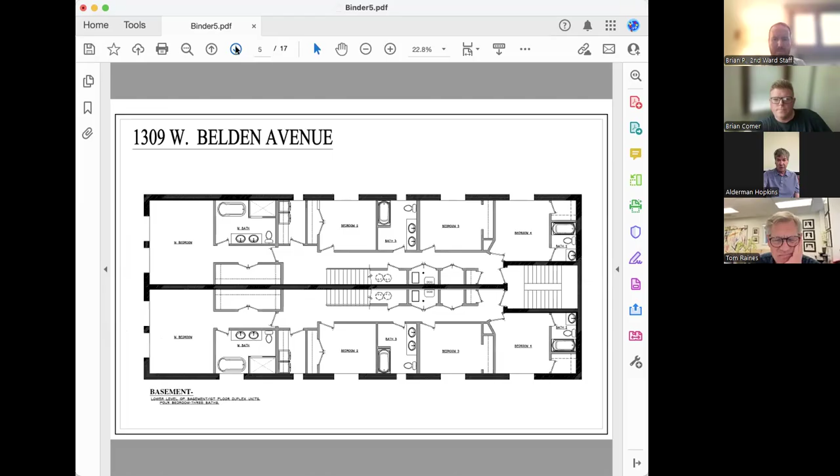If they seek a zoning change or if they seek a variance through the Zoning Board of Appeals, or even in some cases, if they seek a permit, which is incumbent upon us to consider whether we issue or not, they are entitled to due process. And tonight's meeting is simply to provide that for them out of a sense of fairness.

It doesn't mean that any decision has been made, and it doesn't necessarily mean that this is a track to approval or denial. It's simply one more step in an open, transparent public process that I, as the alderman, would grant to any landowner anywhere in my ward that was seeking to do a development deal.

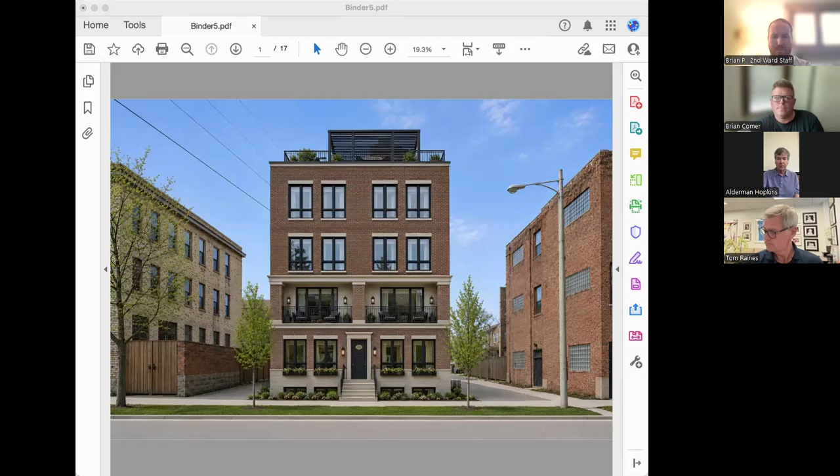So that's why we're here tonight. We're going to assess the proposal that you see. This is a new one. I know some of you are familiar with the history of this parcel and with some of the proposals that have been offered over the years. This one is different, and there may be pros and cons to this proposal that were not present in the previous iterations. So that's why we're soliciting neighborhood feedback.

That is a very important process in my decision making. I take my neighborhood seriously, and I take your opinions very seriously. So we're going to use tonight to gauge that. No decisions will be made tonight, but we will keep the lines of communication open in the following weeks, so you can continue to engage and tell me what you think of this proposal, and see if it passes muster with the community.

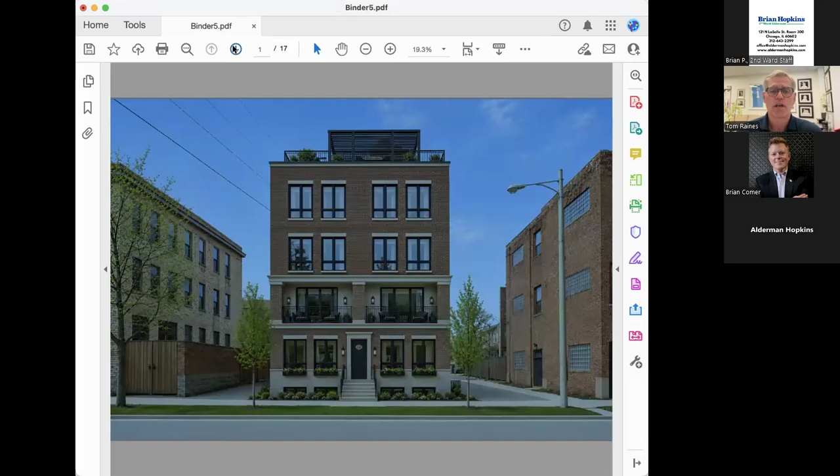Before I do that, I'd like to share the site plan for the entire parcel. I have to make a turn here to do that because of the way it's laid out.

So I'm going to share my screen. Can you see the screen here? I'm going to rotate it to landscape, that might be a little easier. I just have to twist it and make sure it's sharing because I can't see it in double mode.

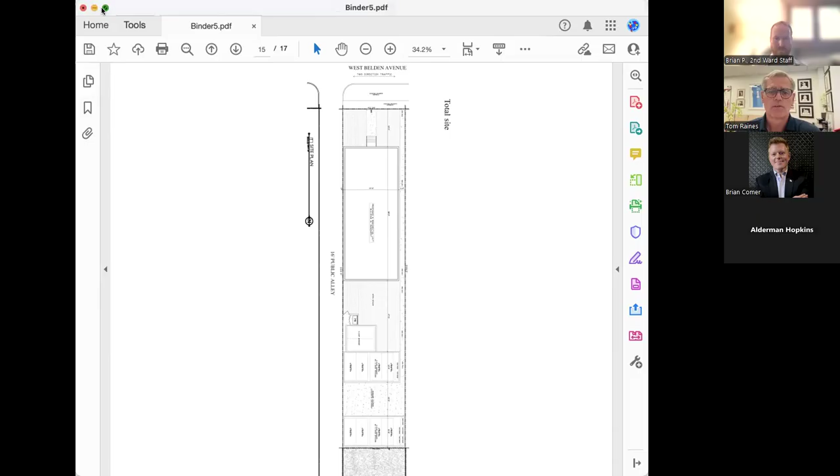So I am going to rotate this view and give everybody an idea of this entire parcel. I'll try to zoom it once, we may lose some area, but this is probably about as close as I can get. On the left side of the screen is Belden, facing north. This is east, this is west, and the rear of the property is south.

Combined, this entire parcel is 19,228 square feet. As you can see, we've split it up. It's roughly 42.25 feet wide along Belden, running west to east, and running north to south it's 455 feet in length.

The proposal here is to take the front half, the north half, and let me zoom out so we can fit the whole site plan in. It's this parcel here to be developed, and the balance of the parcel, approximately 9,700 square feet, would remain open land and would be donated, whether to a community group, the adjacent landowners, or some other organization—that's something we can discuss further. That would simply be donated as a community benefit, and the development would move forward on this site plan.

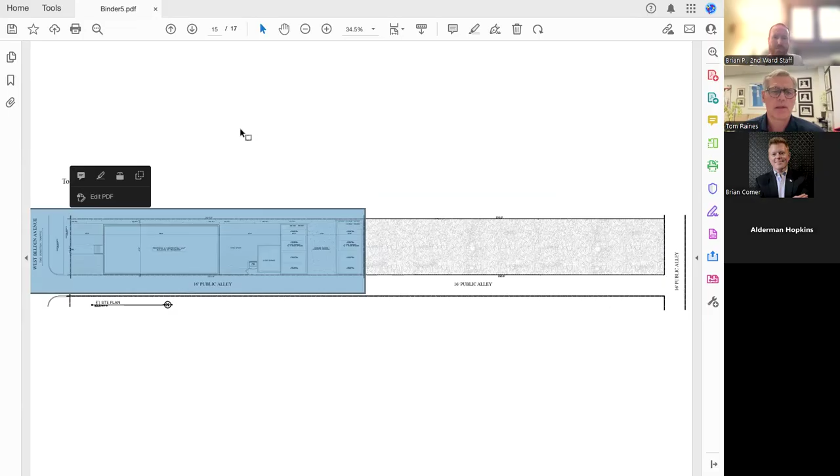So with that, I'm going to change the view to go back to the first page of this presentation and give you the elevation from the north. What you're looking at now is the proposed project and the north elevation, as if we're standing on Belden looking south.

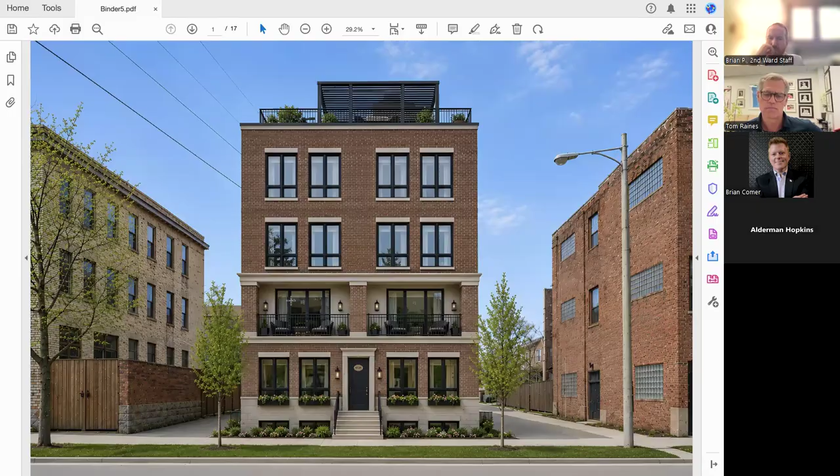Proposed is a 4-story, 6-unit building that will contain 2 units on the first floor that are duplexes down, so first floor and lower level. The second floor will consist of 2 units, both 3 bedrooms, single floor units, and the third and fourth floor will be 2 units that are duplex up.

The current zoning for this parcel is RS1. The proposal here is to go to RM 4.5, which would allow a 1.7 floor area ratio, giving roughly 16,163 square feet of buildable square footage on this parcel, of which this development only proposes using 11,747.

So I'll give you an overhead view of the site plan. As you can see, this is Belden on the left, on the north. Here is the residential structure comprised of 6 units, and here is open space in the rear.

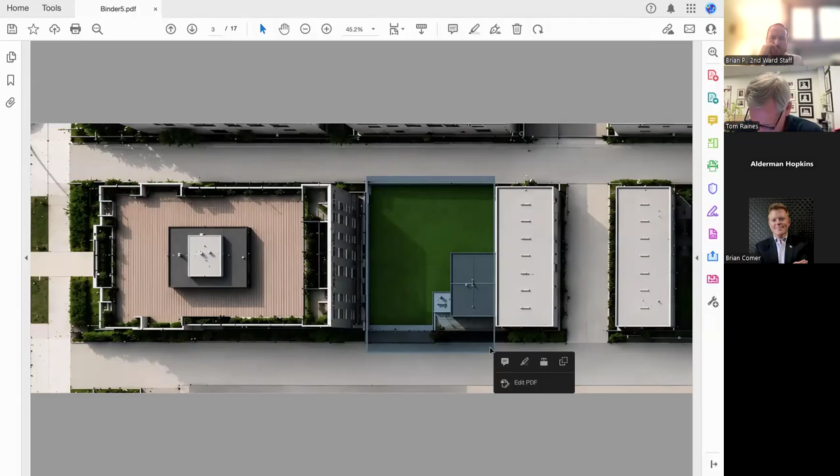And we're proposing providing—for the rear setback, we're proposing 111 feet of rear setback as opposed to the required 67. So there's quite a bit of open space here. There's a 2-car garage, and then there are 2 4-car garages with a courtyard.

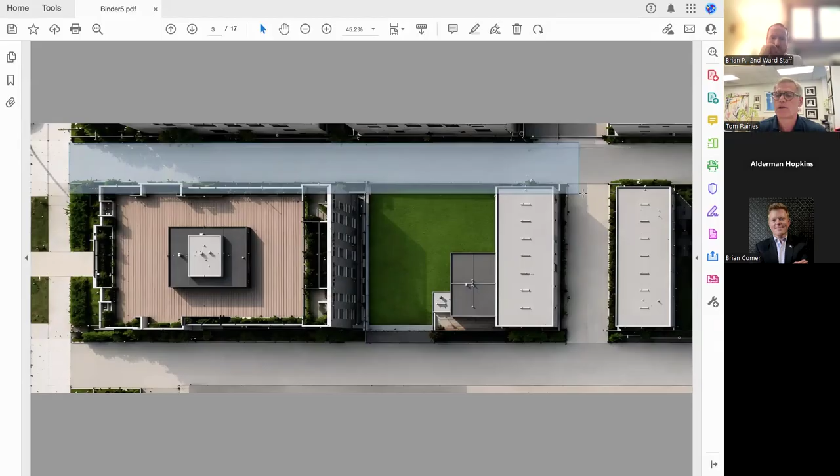As you can see, this is approximately a 4 feet 4-inch walkway that would go along the east side of the property. You can see that here in this more dimensioned site plan, which I'll zoom in a little bit.

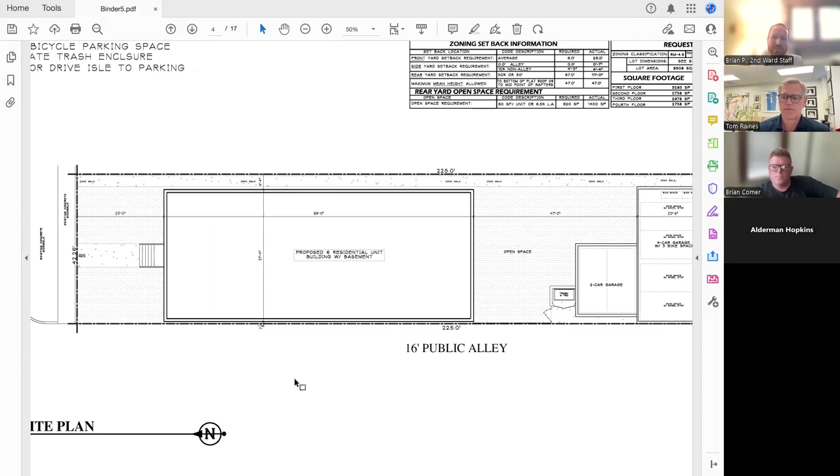If anyone would like me to go back or forward, I'm happy to do so. Just put it in the chat and Brian can tell me verbally what he'd like to do, because I'm doing this and I can't see the chat.

This gives you an idea of the placement of the building. The front setback would be 25 feet from Belden, 4 feet 4 inches here. It's essentially on the alley line, providing about 7 inches of setback from the alley line.

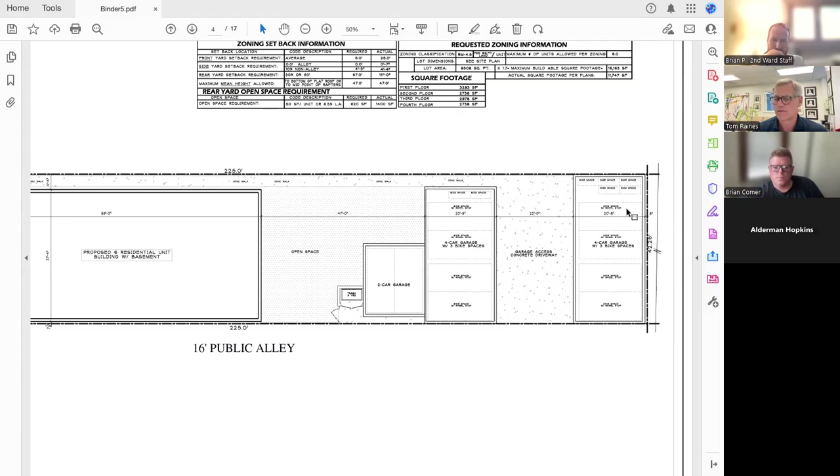And again, here is a substantial amount of parking for 6 units, which include this 2-car garage, a trash enclosure on the alley side, basically a courtyard for vehicle access to both garages and the 2 4-car garages.

Here are a rendering and floor plan of the basement portion, which would be the duplex down of the two units on the first floor and lower level. You can see they're pretty ample. The combined square footage for the first floor and lower level is 3,293 square feet, making up the two units on the first floor and lower level.

Moving on to the first floor, this is the upper level of the duplex down units, and this is the combined square footage for the lower level, which is 3,293. Moving to the second floor, there are two units, each 3-bedroom, 3-bath, all confined to the second floor, made up of 2,758 square feet.

Then we go to the third floor plan. These are duplex up, 3rd and 4th floor, and they provide a rear deck as well. The living space is on the 3rd floor and the bedrooms are on the 4th floor. This is the roof deck, and there's a stair enclosure that comes out on the top.

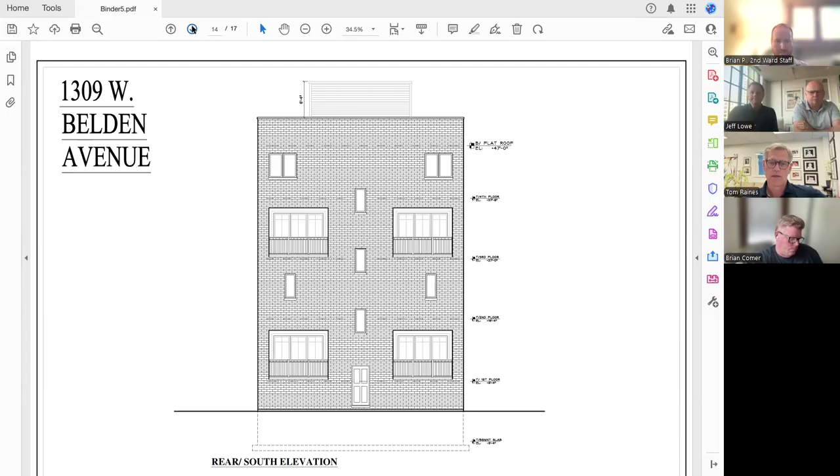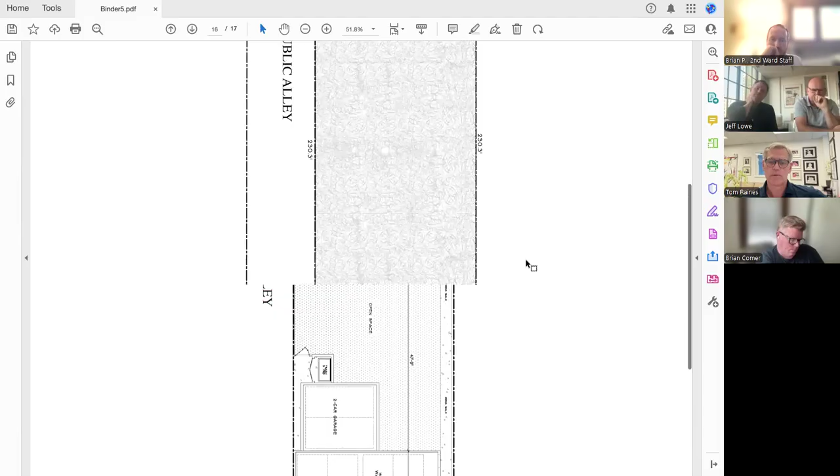And then here again is the site plan that we looked at in total. This gives an idea of the site plan for the various areas split. Again, the buildable site area is 42.26 by 225, and the balance of what will be the open space donated to the community would be 42.26 by roughly 230.

So, as I mentioned, the request would be to go from the existing RS1 designation to an RM 4.5. I'm happy to answer any questions the alderman, Brian, have for us, and I'm happy to address anything you'd like us to address from the chat.

Thanks, Tom. So I would ask that anyone on the call that has a question, please type it in. Tom, I'll start with a couple, based on some of the questions that have gone around with previous iterations of this property and what people have been talking about now.

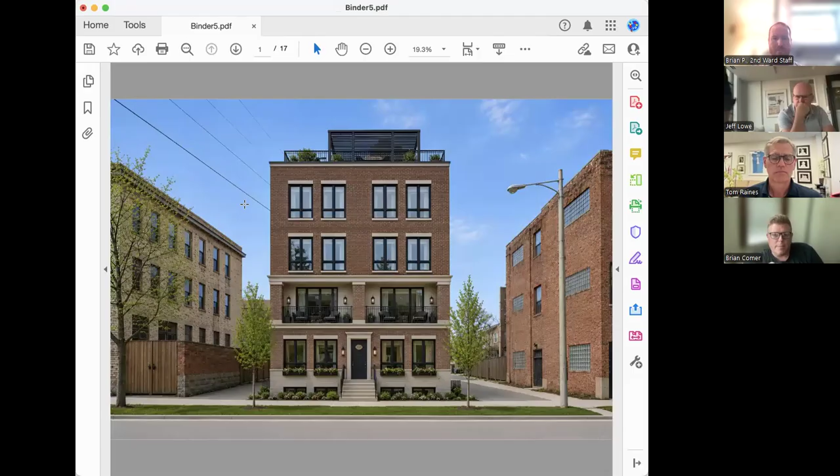Do you have an image showing your elevation compared to the existing elevation facing Belden? I believe that was represented in the initial renderings, the first two, let me go back to those. Only because that building to the east doesn't really look like the buildings that are actually there. The one to the west does, across the alley. Okay, so this is what we have. We could easily get that. I think that would be helpful to just give people an idea of what they're looking at straight on, the different height elevations.

Can you also address the trees for the existing Lakewood homes? There's some overgrowth of trees in the backyard. Have you looked at that, and what would be the impact there? Would you be asking for tree trimming or tree removal from the Lakewood homeowners? I'll defer to Patrick on that. That'd be tree trimming only. Trimming only, okay. All right, thank you.

We have one question regarding emergency vehicles. This alley is obviously L-shaped. Do we know the status of emergency vehicles being able to access the entire alley from either entryway? The CDOT address here would be Belden. There were iterations of a development plan which included townhomes and homes along the south portion of this entire property. Chicago Fire Department, namely John Javorka, really couldn't figure out a way to say with confidence that they'd be able to access with full service vehicles.

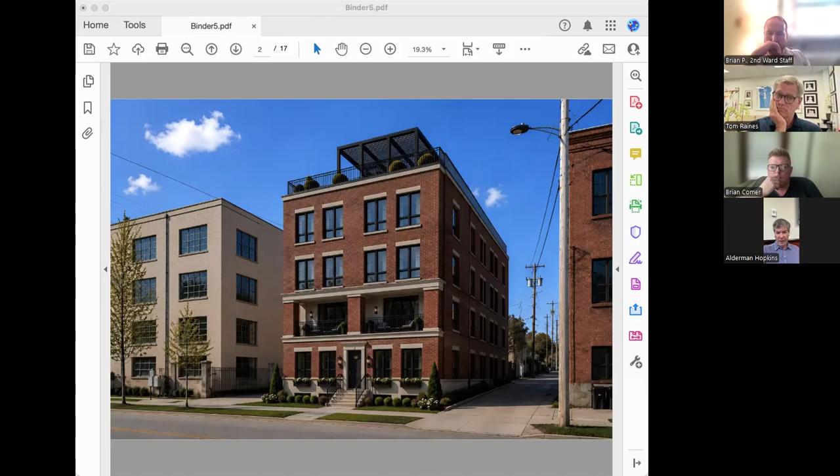We'll get an updated analysis from the fire department on this. And then, Tom, can you repeat the zoning change request?

It's currently zoned RS1, which was downzoned years ago, basically doesn't give a lot of uses. We're seeking to go to RM 4.5, which would provide floor area ratio.

A calculator of 1.7. We do not intend to use that. In fact, we'd use a relatively small portion of that. We would do it as a type one, meaning we would submit our plans in conjunction with the zoning application, and we would roughly be at 11,800 feet of the allowable 16,100. For those who don't know what a type one means, it means the plans we put forth for the zoning amendment are the ones we're bound by. Even though RM 4.5 would allow us 16,100 square feet of buildable area, we would only build 11,800 of that, and we would be bound to that.

Addressing the garages, there's one 2-car garage. Is that going to be accessed directly from the alley? All the parking is going to be accessed from the alley, save for the 2-car garage which is directly off the alley. The other two garages face each other with a courtyard, which is accessed off that alley.

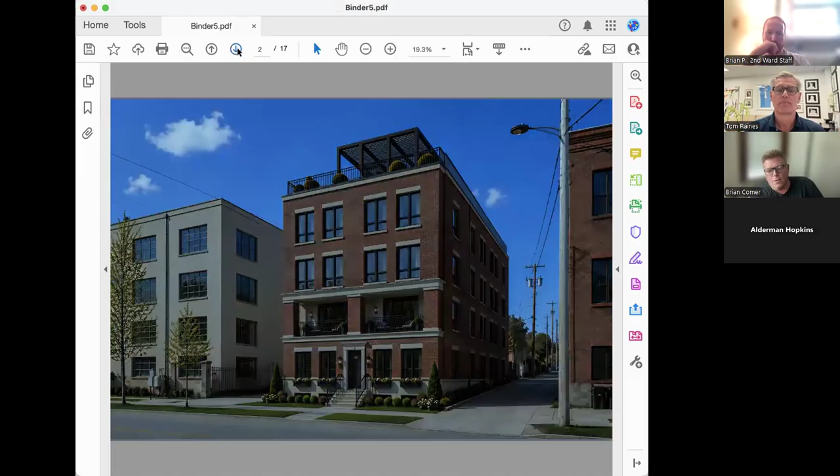And then what we would call in Chicago a gangway, between the proposal and the building to the east, how wide is that? 4 feet 6 inches.

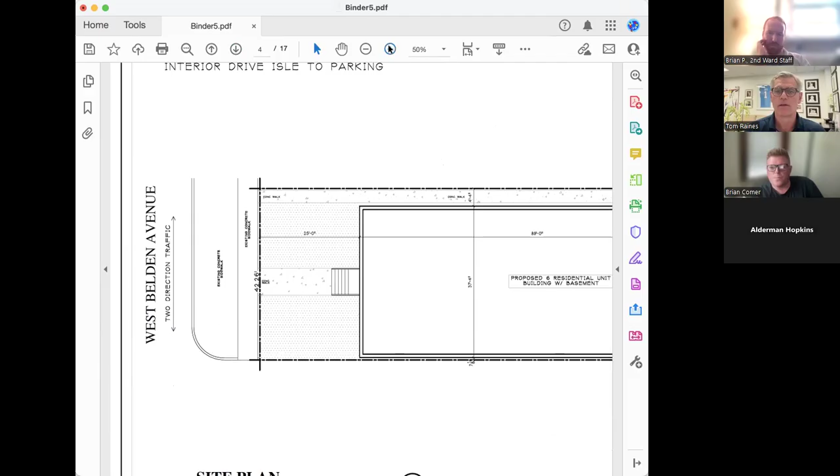Let's go with the site plan on this one, I think that's much more to scale. I'll give you this site plan. The rendering's nice to get an idea, but I was going to detail what it was so we could see it better. I don't know about you guys, but I got old eyes, this is kind of tough for me, but here.

There's a few comments about how the gangway looks almost as wide as the alley on that rendering, and I have to agree. But the site plan is to scale, which is good.

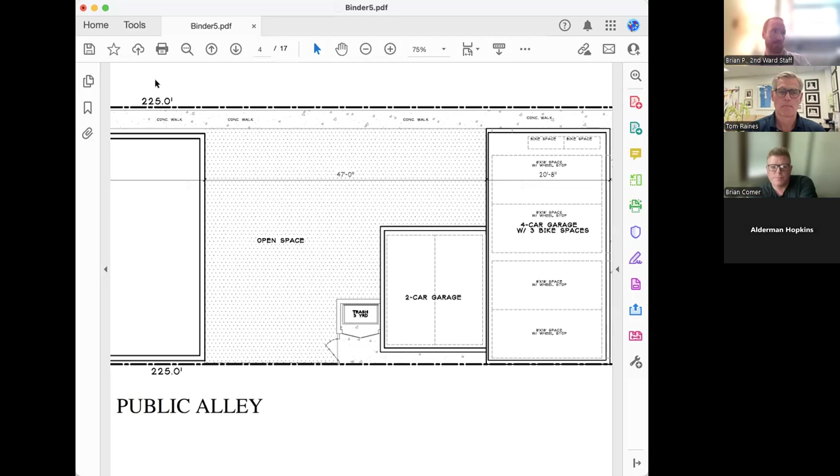Brian Pelrine, is there an average width of a city gangway? That's a good question. I can say anecdotally, 4.5 is pretty generous, especially for this neighborhood. A standard city sidewalk is 4 or less, I believe.

Is it? Well, remember sidewalk cafes, are you talking about residential? I'm talking about residential, you need 6 feet of clearance on a commercial corridor, but yeah, a standard residential block sidewalk.

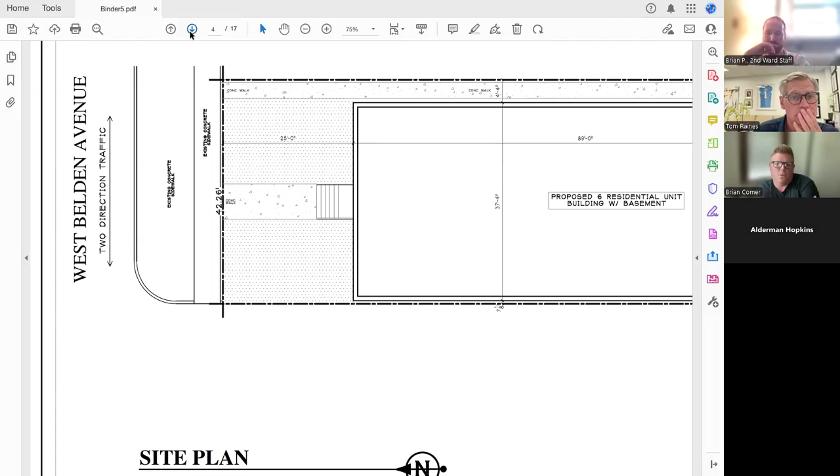Okay, and so then the difference in height, Tom, between the top of, let's just call it the pergola, and the actual inside ceiling would only be 9 feet, 47 to 56.

I'm sort of ballparking that, but if I'm off by a couple inches. If you could see here, they're going from the flat portion to 8, almost get you all the way up. That's 8.5, and then it looks, if you're just scaling this thing, if this is roughly 6'4", this is probably not a foot, but let's just call it a foot.

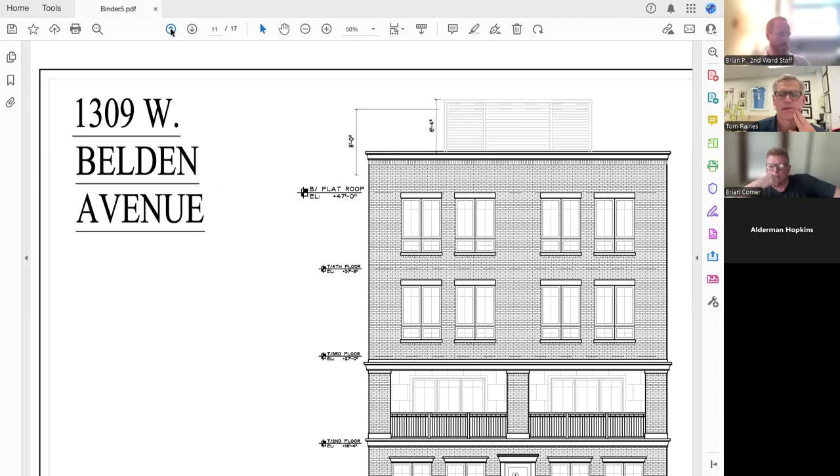So, 47 and 9. But that's set back, and that's a smaller portion of the roof. I'll give you an idea on the plan. Well, this plan doesn't have it, you can see it on the elevations, how deep that is in the building from the lines of the building.

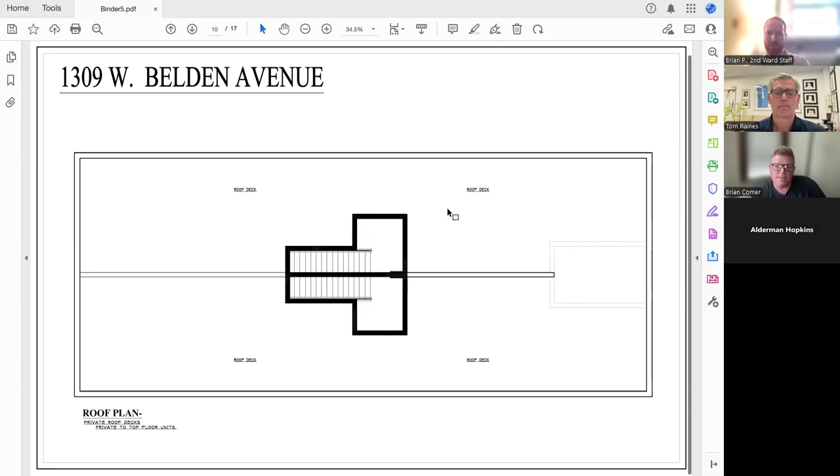Next question. Will the new building block the sight lines of 1321 West Belden towards downtown from the roof? 1321, which would be immediately west, separated by the alley? That might be my best guess. Like I said, we'll provide you with the height of the adjacent properties, I don't know the answer to that off the top of my head.

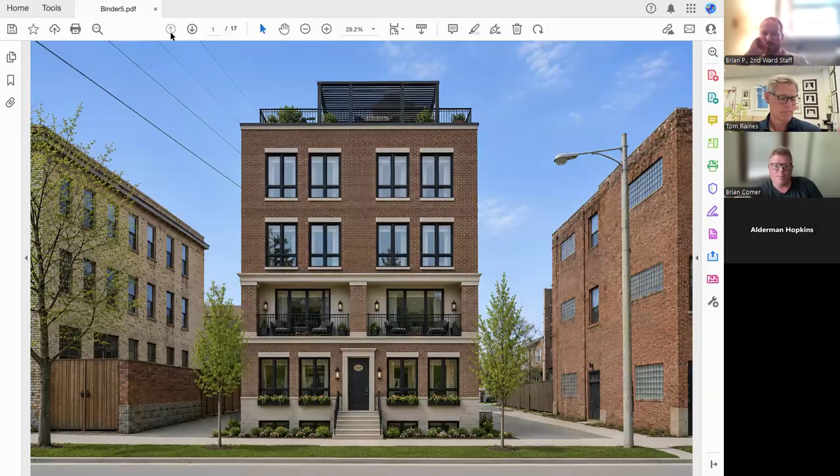Then we have a number of comments and questions about, probably I'd say the most unique portion of this plan, the undeveloped parcel to the south.

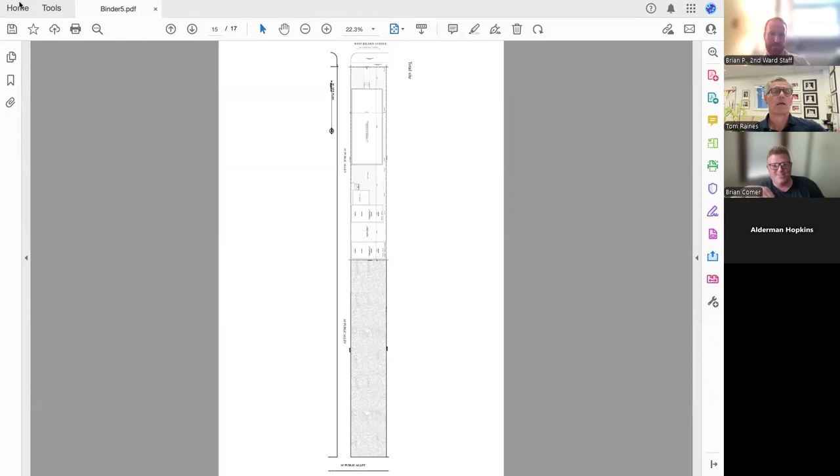One question is, who are you actually going to donate it to? You mentioned it at the start, but what are you thinking? Because unless something's changed and the alderman can address that, I don't think the park district's gonna take it. The park district can take a minimum of 2 acres. I just went through this in Fulton Market.

We donated a park for the community. It's not a park district park, and it's not maintained by the park district. There was some agreement with providing some infrastructure to that area. It was a little different than this, but we understand there's a need for some open space here. This is a relatively substantial piece of open space, about 9,700 and some change square feet in the middle of a pretty dense residential area. I know people have been enjoying this open land for a period, so I thought a good compromise was providing more than half of it as a benefit to the community. We welcome any input from the alderman's office, from your group, and from the adjacent neighbors, and we'd like to provide this as a community benefit.

Okay, and who owns the long contiguous property right now? It's all owned by a group of three men, the same people that have owned it for 20-something years.

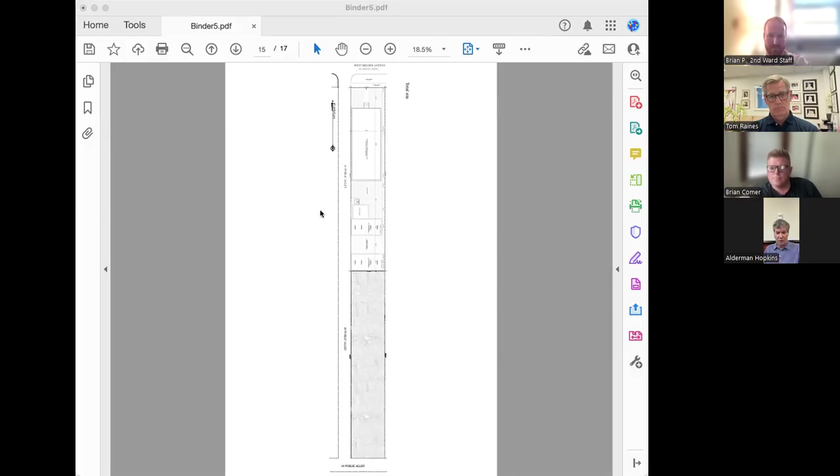In my experience, and Tom, correct me if I'm wrong, it's rare for a type 1 deal to get through the approval process and then be sold. Usually the person who negotiates all the details of a type 1 does so with the full intent to follow through with the deal, not to give it to someone else. So in this case, there's no negotiating here—it would be a type 1. It's a non-starter to think otherwise. I'd expect that if we get to the point where there's consensus that this is acceptable to move forward, I wouldn't accept any transfer. I'd expect people who make promises to the community to keep those promises, and I wouldn't entertain any other options. So this would have to be a type 1, or it's not going anywhere. Understood.

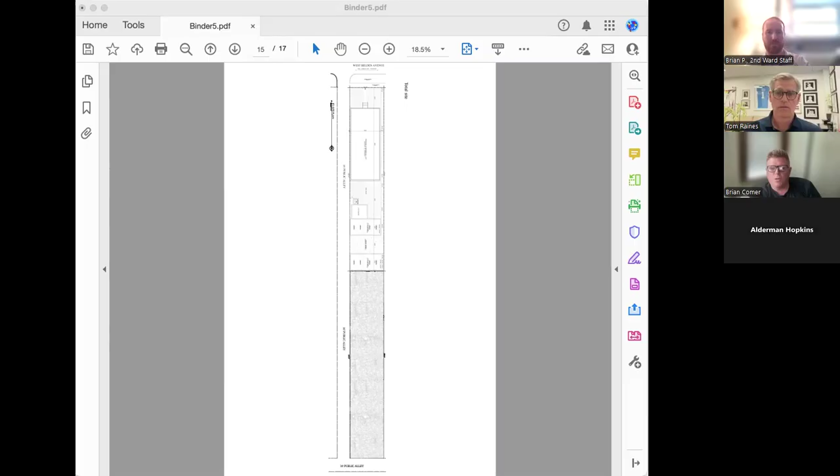Tom, an additional question about the unused portion of the parcel and working out who that could or would get donated to is a whole other topic. But would the development team actually build the park? Are they planning on that? There is no plan to do that—they would donate the property. I'm sure they might be willing to participate in some way, but at this time, contributing a 9,700 square foot piece of land in the middle of Lincoln Park is substantial.

Another question here, just to repeat the total unit count, it's 6. In past proposals, there have been light and shade studies completed. Is that something that's already been completed, and if not, is the team willing to do one?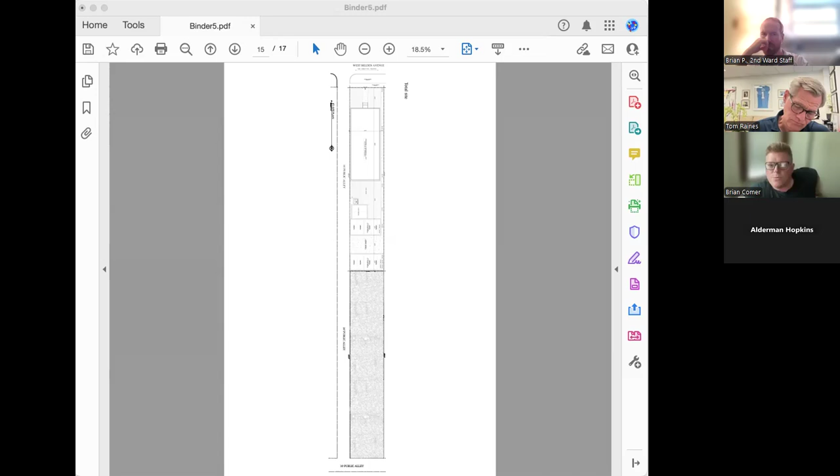To my knowledge, it has not. I can get back to you with that answer. There were a number of similar comments regarding emergency vehicles, and the alderman addressed that that's something they would confirm, whether emergency vehicles can fully access the property, since this proposal is very different from previous ones presented to the community.

Is the proposed building aligned with the two buildings adjacent to it? If not, why? We don't know the answer to that, but that's one of the follow-ups we'll provide. Will you improve on that? No, not about that.

What is the proposal for lighting on the eastern exposure, for privacy concerns for residents on Lakewood? I don't think there's a plan in place yet, but it's certainly a topic we'd be willing to discuss. I don't think there's any reason for over-illuminating that area. One thought was uplighting along the east line toward our building, so nobody would have anything shining in their windows—ground uplighting from the easternmost line of our property, across the gangway toward our building. To me, that would seem the least intrusive while still providing illumination for public safety and for the privacy of residents.

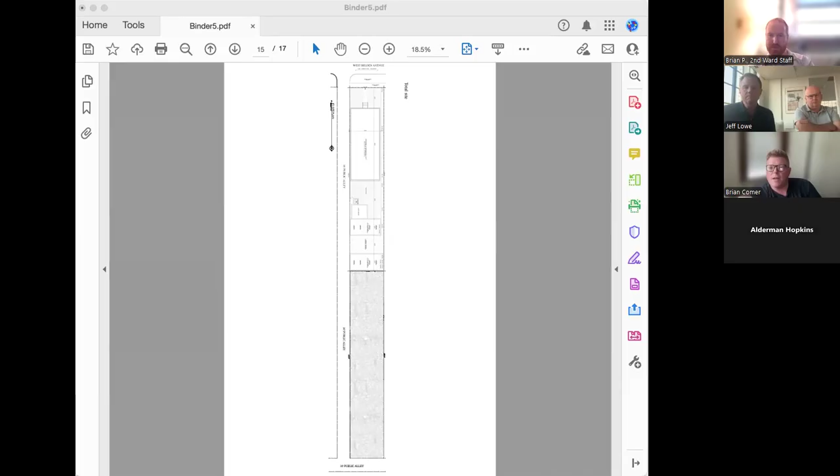There were also more comments about elevation, which I think Tom will help address once we see that elevation comparison. Also, the 200 block of Eugenie—just throwing that out there—and the 1400 and 1500 blocks of Wieland and North Park. What about Orleans? I don't think Orleans has alleys either, does it? Anyway, sorry, go on.

If the project was approved, what do you estimate the timeline for completion to be? Well, our zoning and entitlement work would probably take a total of 3.5 to 4 months, and then from there there's permitting—I'll defer to Jeff and Padraig. It would take about a year for construction, start to finish.

There were also more questions about remediation of the unused land to the south. I think that's been answered in the sense that it's going to be turned over legally to another entity.

How do we get to the park from Belden? If it was space open to the entire community, where would you see that public access coming from? I guess that's a better way to ask the question.

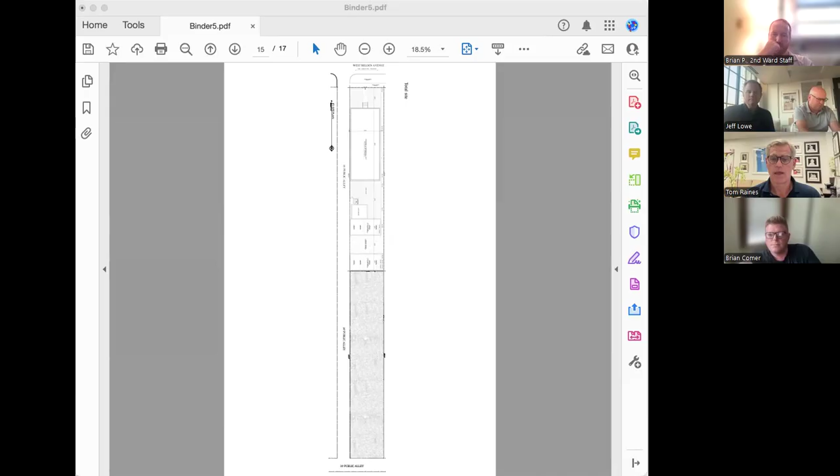They could access it from the southwest, off the block behind, and also walk down the alley off Belden. But not the walkway between the homes to the east? I don't think that's currently the plan, at least in the rendering, and I'm happy to reshare it. It shows access cutting off. Am I still sharing? Can you see it? Yes, okay.

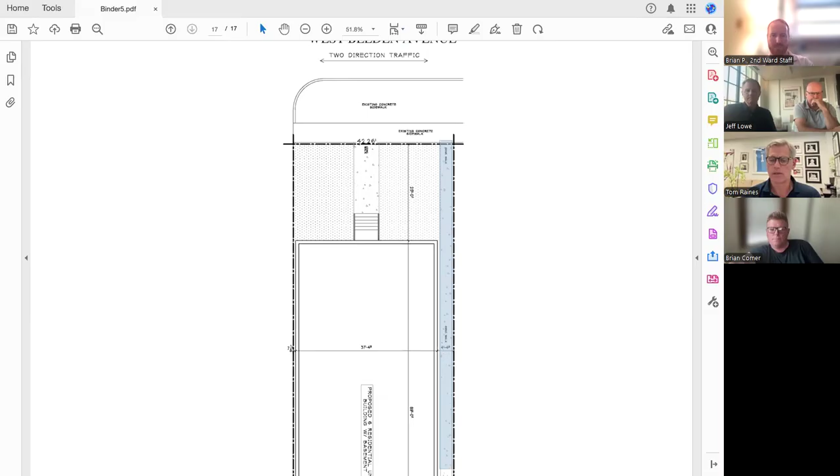Let me close out of this and get to that page. This is probably good - you can see the concrete walk comes to an end at this last garage on the south, these houses, right here. It kind of dead ends there, then goes up and makes its way to Belden. So that wouldn't necessarily be an access point. I don't know how great an idea that is, especially for people living in these properties to the east - you wouldn't want a bunch of people walking through that gangway. I think that's typically going to be an access point for residents, but there will be an alley here, and in the rear, south and southwest, there's access off that block immediately west.

Where are the HVAC units planning to be located? They would all be on the roof.

Will the width of the alley change from the present width our cars now drive on? I don't think we could if we wanted to.

How does this compare to the building on Webster that sealed off this right of way? It was built maybe 15 years ago - I think a lot of the same people were involved here. How does the building size compare, just for context for people? You mean 1310, 1312 Webster? Yeah, that site was 60 feet wide and about 120 feet deep, so it was wider and shorter - the building was much wider. Is it also shorter than what's being proposed here? It is shorter, yes. How much do we know? About one story shorter, approximately.

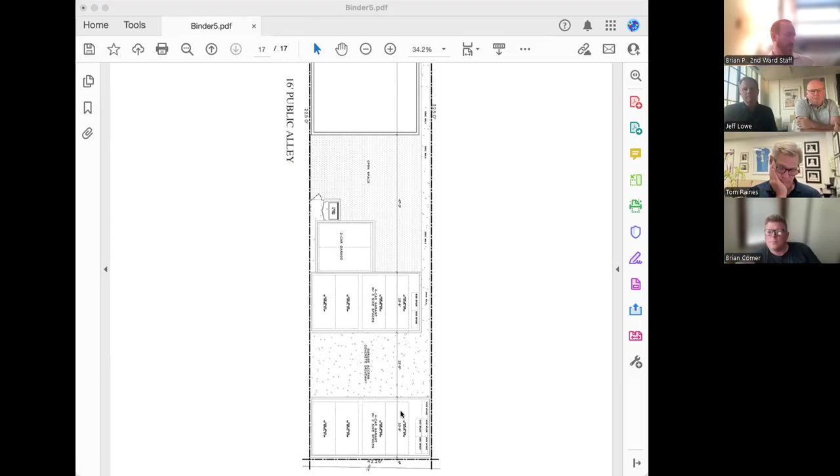This question is for the Aldermanic office - would these drawings be made available? I don't see an issue with that, and we are recording this meeting as well, so we'll have that posted for anybody to go back and view if they weren't able to attend or want to see a detail that was missed live. But yeah, I don't see a reason we couldn't share these drawings as needed.

Next question - I assume they mean the entirety of the building front to back, but does it need to be set back so far from the sidewalk? Is it required to be set back that far? I'm just reading it verbatim, assuming it means the frontage of the building. I don't think that's required for the front yard setback - it's like 8 feet required, and we're giving you 25. Typically this is kind of a bonus for the community, they like a setback. If they'd prefer it closer to the street, that's probably something that could be done, but no, 25 feet is not required here.

The next question again asks about emergency vehicles, and whether it will inhibit people's ability to get in and out of the garages. That absolutely could never be the case. As the alderman said, they will get the answer on emergency vehicles, and a new study will be done based upon these development plans because they're different from the previous renderings.

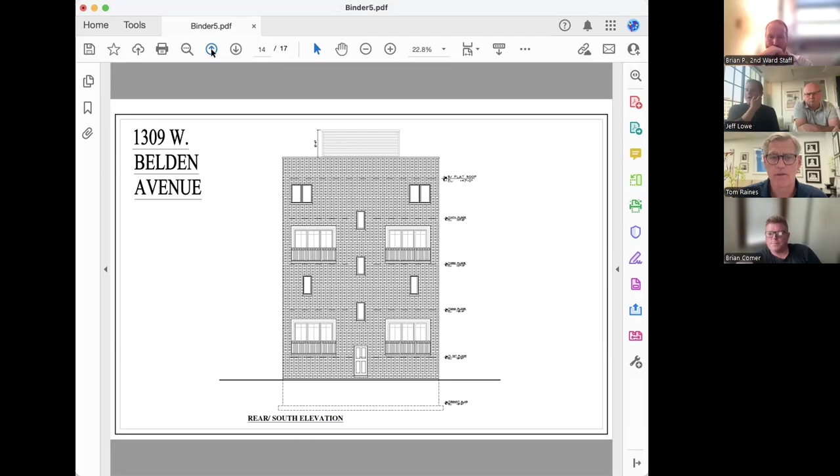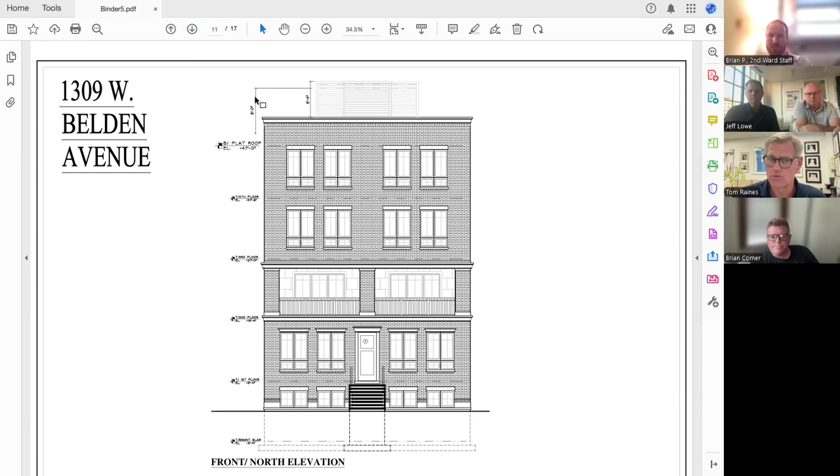What I can give you that is exact - these architectural renderings with respect to the elevations and floor plans are exact. These are exact numbers here in terms of height for this building. In terms of adjacency, we will put that together. But what's being presented here, the color renderings are just based on the architectural and are not to scale - these, in fact, are. So this will show you exact heights, and these renderings are specific. The site plan is specific for the most part, but you have to remember this is relatively preliminary as we sit here today.

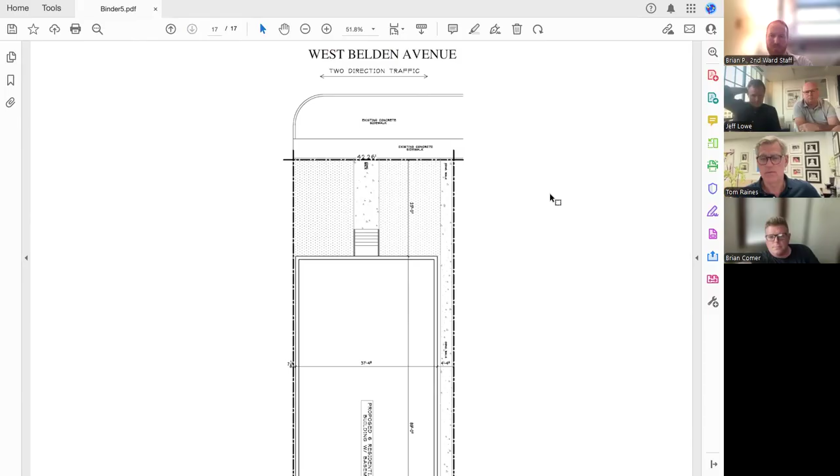If this should advance, we will undertake the light and shade study for the height of the adjacent properties, and address the lighting along the east line. Those are all things that are relatively expensive, and we're quite in the preliminary stage here.

Next question: would the undeveloped parcel remain RS1 zoning?

I think that would probably be completely up to the alderman, whoever ends up managing it. What we did in Fulton Market, DPD wanted it as POS, park open space, which they would probably suggest here, but we'd leave that to the alderman, because if you leave it RS1, someone could develop it. I mean, probably not going to happen, but someone could develop it with one of the RS1 uses, some of which aren't so pleasant.

Another question about maintenance of the donated portion of the site. That's a discussion that would be had later, but Tom did mention that the development team would participate in that, though it's not something they're planning on taking on themselves 100%.

Are these condos or rentals, and how much would they cost? At this point, I think it's probably too early to estimate that. They would be condos. Do you have an idea of the price point, or is it too early? Probably 1 million to 2 million, something in that range.

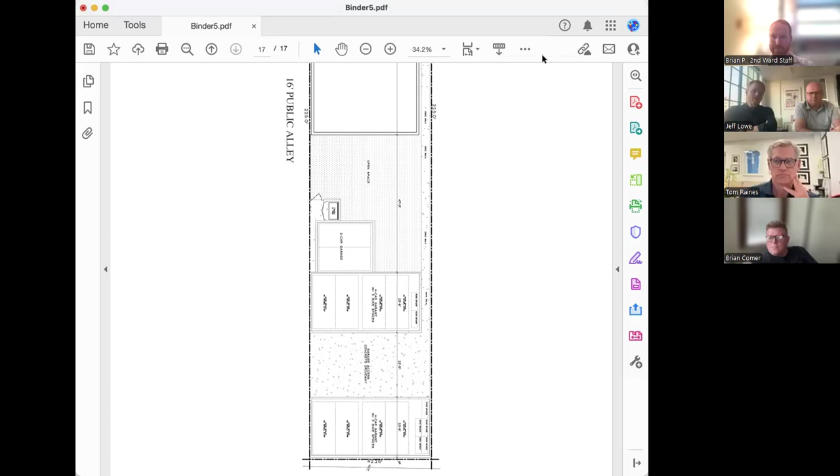So we are still getting a lot of questions and comments about the donated property. As we've mentioned a couple of times, that's something that's up for discussion as to who it would be donated to. There are no specifics on that, but it's essentially a portion of this property that the new owner would gift to whatever entity agrees to take it.

Yeah, if you don't mind me chiming in, we've talked through that. I don't live within Sheffield Neighbors, but not far away, and I've been through a number of zoning meetings like this, not nearly as many as you all. I think one of the things to focus on is it's almost 10,000 square feet of space being given to the community, and Sheffield Neighbors is a very active community. Perhaps they would want to be involved, or perhaps it's just the neighboring hundred people. St. Josaphat down the street, their playground is on Belden Avenue in the afternoon, so they've shown some interest in potentially being involved too. I think there'd be a number of entities, and it wouldn't take a lot of money to get it going, but to maintain basically 3 city lots wouldn't be particularly expensive. I think you'd have a lot of people really enjoying this space, and I don't think it'd be hard to raise that money to keep it a nice private park for the immediate community, if that's what they end up trying to do.